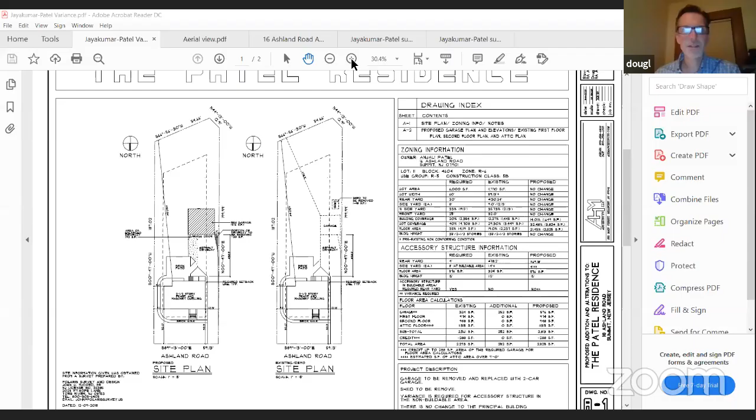The house has an existing detached garage. I could pull up and share the drawings and we can go through them, might be easier for everybody to look at. So this is the same drawings that you have in front of you. What we're talking about is this garage here, in this area, is an existing detached garage. It's about 38 feet from the house. It's 18 by 18, so much smaller than what is typical for a 2-car garage nowadays for a modern car.

So what we're proposing to do is demolish the garage because it's in disrepair and construct a new 2-car garage that's 24 by 24. We're going to keep it in the same location in relation to the house, 38 feet, but we're going to slide it over from the property line. The existing setback right now is only 1.4 feet, and we're going to slide it over to 4 feet.

We're designing it in a way that would be conforming if it was a detached garage, which it is. But in your ordinance, I guess we'll need a C variance for this because it's not in the required rear yard, which would be all the way back here, which would allow it to be that 4-foot setback. But because we're placing it closer to the house, we require an 8-foot setback. So that's the variance we're asking for, a side yard setback, 4 feet where 8 feet is required.

The reason why we placed it here is because if we place the garage all the way in the rear, it would be about 113 feet from the house. And that's just not really practical. To park a car all the way back here and walk back and forth from the house didn't make any sense. I looked through the comments from the various departments, and the biggest concern was the amount of impervious coverage.

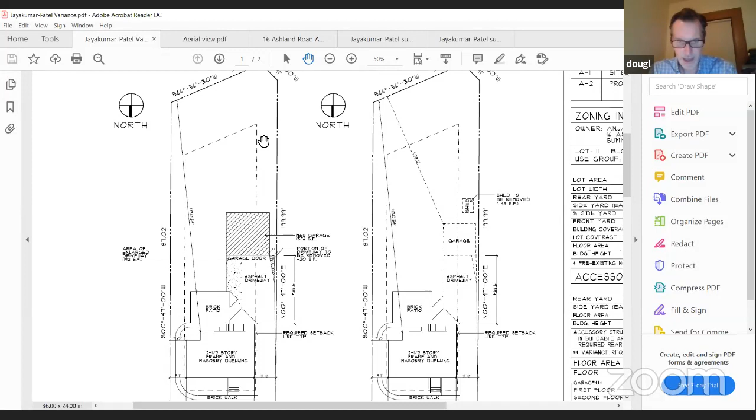So I think we're going to have really minimal impact. The deep lot in combination with the existing non-conforming placement of the garage really gives us few options of where to place it. So I think placing the garage here, the benefits outweigh the detriments. By constructing it here in the rear yard, it's very difficult to see from the street. I think it's going to be more attractive than the existing garage. As I scroll through to the next page, you can see it's an attractive garage.

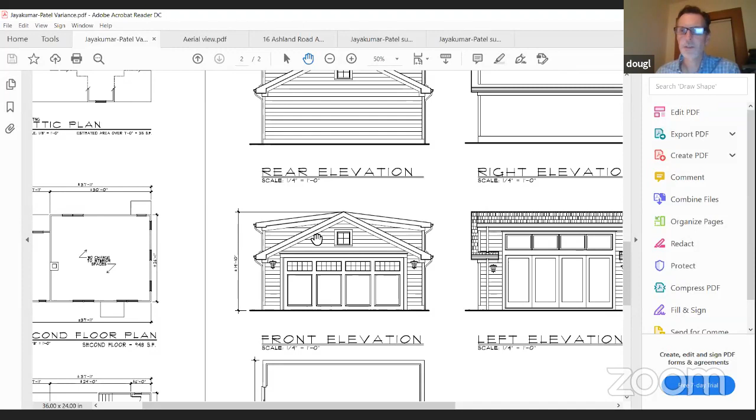It has some nice materials. We're going to be using materials that complement the existing ones on the house, so the garage looks like it was built originally as part of the house. We have some nice pleasant roof lines, and we're going to do a carriage type door on the front of the garage. So overall, I think it's going to be quite a nice improvement to the property.

It's also going to allow them to take their cars that park in the driveway and create visual clutter for the neighborhood, and be able to pull them into the garage and get them out of the driveway. So overall, I think it's going to be a benefit. It also, like I said before, conforms to all of the requirements, and overall I don't think it's a detriment to the master plan of the city of Summit.

So I think that kind of covers it. It's a pretty straightforward application. So I'll open up to any questions.

Mr. Dour, if you'd like to kick us off, is there anything in the engineer's report that we should be aware of? I saw a note about stormwater management, but I'll let you dig in if you feel it needs to be investigated further.

I think they should look into putting in a seepage pit to handle that increased impervious coverage.

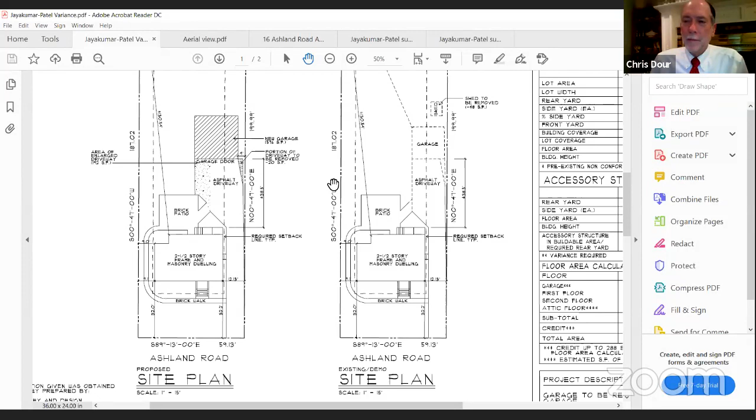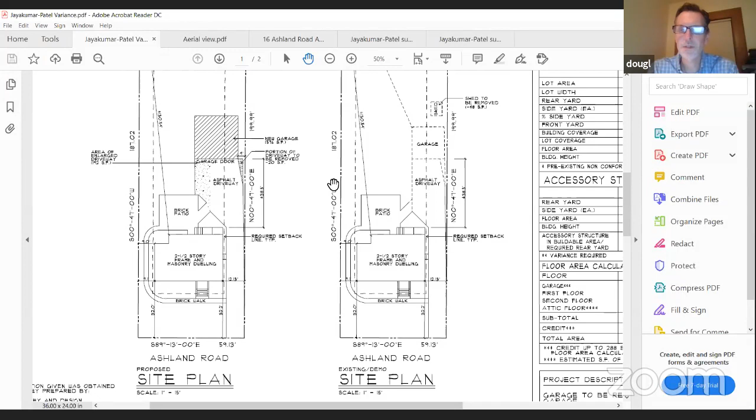I heard that real quick. Did you get that, Doug? Yeah, I think so. What we're planning to do is put in a seepage pit or a dry well to handle the increase in impervious coverage. Obviously, we'll design it to take all the runoff from all the new structures and put it into the dry well, and we'll design it in conformance with the town engineer's requirements.

So we would ask, just as a condition of the application, that you accept the engineer's letter in whole, for which the stormwater management component is a portion of that letter. It's a call out. Correct. Okay.

Any other questions? I agree with you, Doug. It's pretty straightforward. Any other questions from board members with regard to the application?

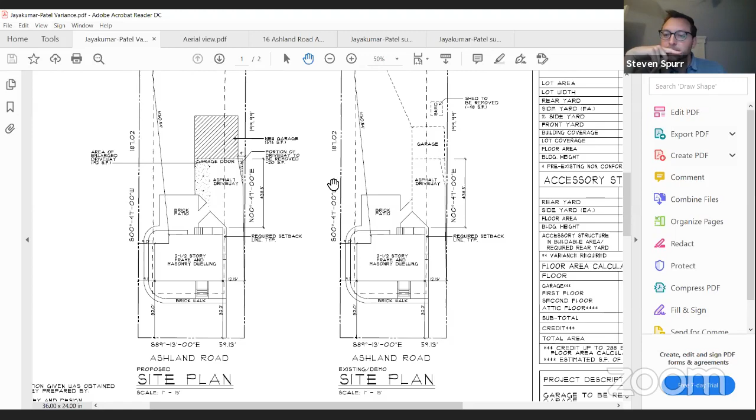I have a question. Maybe this is already covered because you said they're going to conform with the engineer's report, but it did mention the shed, and there's a little shed behind the existing garage, I guess. So is that going to be removed then?

Yes, we're removing the shed. There's about a 50 square foot shed there, so we're going to remove that. That again will kind of open up the backyard and create more open space. Okay, thank you.

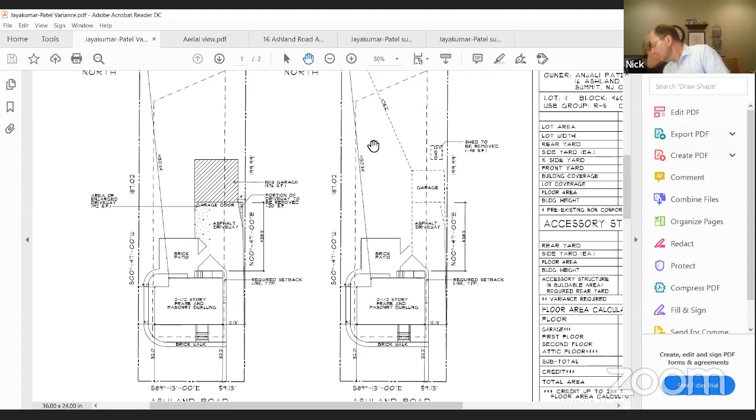Any other questions from board members? Speak now, or forever hold your peace. Seeing none. All right, Doug, I think you did a nice job there.

We'll revert back to the applicants now. Ms. Patel, or Dr. Patel, I think I saw you on the Zoom link there. Is there anything you'd like to say in closing, just to wrap the case before the board moves into deliberations? No, just thank you for looking at my application and considering it.

Okay, thank you. And I'll just pause for a quick second. Are there any neighbors here for questions or comments? I didn't see anyone for this particular application. Before we move into deliberations, wave your hands frantically or hop off mute.

Oh, there we go, Mr. Burns. All right, if you want to hop off mute. Can you unmute yourself, Mr. Burns? Sorry, we can't hear you. I apologize. Oh, there you are. Sorry, did you have any questions for the architect or the applicant, or any statement you'd like to make?

No, I didn't get the architect's name again, what is it? Yeah, my name is Douglas Miller. Okay, and that's AH Architects? AHM Architects in Millburn, New Jersey.

Okay. Yeah, I live three doors down on Ashland Road, corner of Maple and Ashland. Just, Mr. Burns, the number of your home? I'm sorry, 128 Maple Street, which is the corner of Ashland and Maple. We've lived here 34 years.

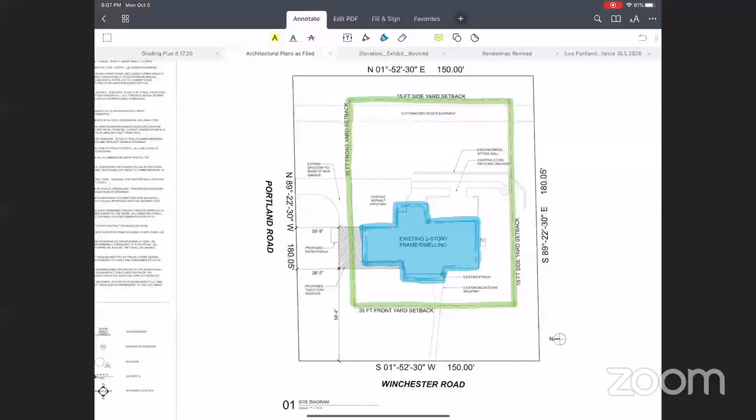Chris, is that visible now? Yes. Okay, and we'll mark this as A1. That was not submitted prior. Correct, this is the architectural plans just rendered by yours truly. This site is a corner lot at the intersection of Portland and Winchester Roads. The existing home is a Georgian colonial located in the building envelope closer to the Portland side than the right south side. It has large front and rear yards, contributing to the practical difficulty and ability to improve this property as a single family home, consistent with the character and style of the neighborhood and modern homes in the area.

If I can mark this as A2. What Miss Elizabeth Rush, the architect, has achieved is to balance the left side of the home, the north side of the elevation, proportionately with the right. This proposal includes a new bedroom, sitting area, bathroom, office, attic storage, and the creation of a 3-car garage where a small 2-car garage currently exists. There was an opportunity to review the comments of Krista Anderson, where she raised the question about the home having a second unit potentially. This addition is intended to create a guest space, but not a standalone unit or apartment.

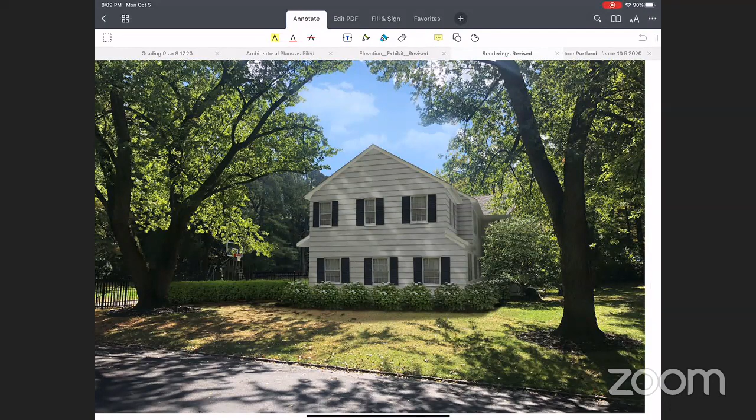This perspective shows what the side along Portland Road will look like, eliminating that portico. This will be substantially similar to what will actually be constructed. The applicants may consider doing a little bit more articulation, but that would be a late stage decision. This will also decrease the variance requested, creating a setback of about 26 feet. They've also eliminated the pocket door inside the home from the second floor hallway to the proposed addition. It will instead be an open access.

There are two variances associated with the proposal, including the front yard setback to the Portland Road front yard. It was initially about 22 feet to the small porch. Now it's 26.2 feet proposed to the new garage wall, where 35 feet is generally required. It is noted that it is about 35 feet from the garage wall to the street, as there's no sidewalk.

I'll mark that in green. This small area here is the expansion of the existing driveway. That will allow access to the new garage. The driveway is 15 feet wide at the curb line. The main section is just under 11 feet wide.

Ms. Anderson's comments show that this is a violation of the ordinance regulating width of the driveway in the required front yard. Because it is a corner lot, this side along Portland Road is a front yard, and that creates the need for the variance here. It should be noted also that the rear entry garage contributes to this because it's not front facing. If it was a front facing garage, which we believe is a less attractive design than this, the driveway could be just the width of the garage opening.

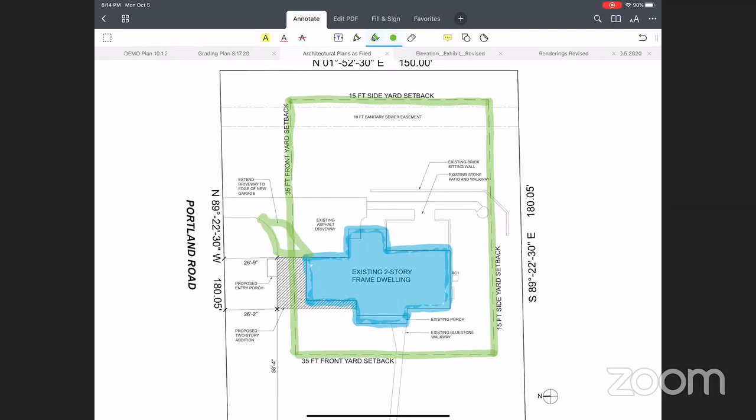The benefits to be gained by this proposal—providing the applicants and the community with an improved architectural appearance and balance, and providing the applicants and their family with a functional living area—substantially outweigh any detriment. If the board should have any questions of me at this time, I'd be happy to take them.

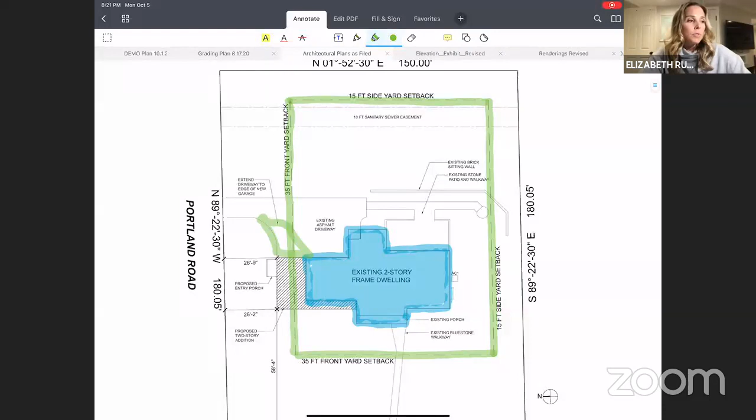The multi-pane windows, the gable roof lines, and the double height columns at the primary front entry along Winchester Road are in keeping with the Georgian architectural style and present a clean, refined aesthetic.

While designing the addition, it was the intent to keep the existing aesthetic consistent with simple massing, proportion, and symmetry. The existing roof line running parallel with Winchester will be continued at the same height and slope over the new addition, creating a similarly scaled volume on the left side of the large front entry porch.

The existing garage with a roof cupola is not consistent with a Georgian colonial and creates an uneven, unbalanced elevation. To resolve this, the addition provides more massing, more windows, matching shutters, and a slightly lowered second floor roof to create articulation, appropriate scale, and differentiation.

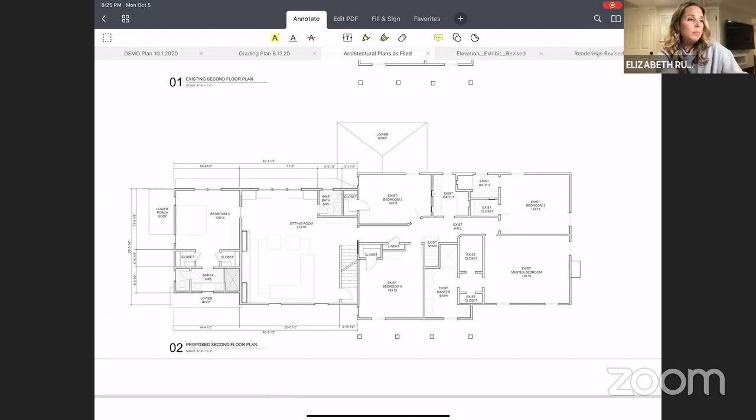There is a home office proposed in the new attic area, accessible by a walk-up stair from the sitting area, and two windowed shed dormers will be provided to give natural light and interest to the rear elevation. If you go to the architectural elevation sheet.

I can, Elizabeth, real quick. Chris, this should be A4. This is an updated elevation showing the changes that we made from Ms. Anderson's comments. Okay.

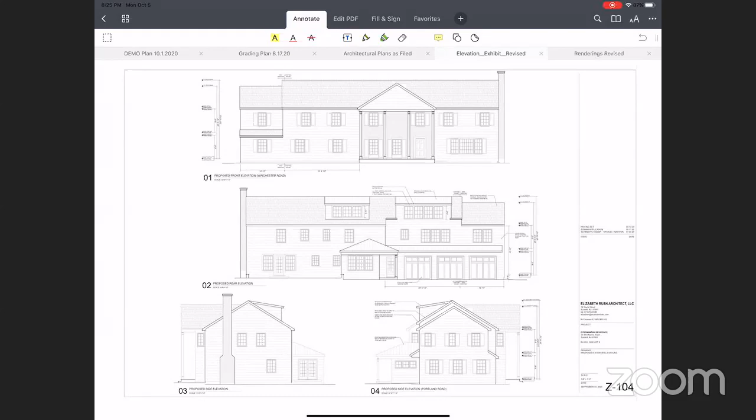The overall height of the addition will match the main roof line of the existing house. It's just over 26 feet tall.

In terms of square footage, we are compliant on lot coverage at 20.6%, building coverage at 10.8%, and FAR at 18.9%. We believe the proposed design achieves the programmatic requests of the family while also providing balance and scale that the front elevation of the house is currently missing.

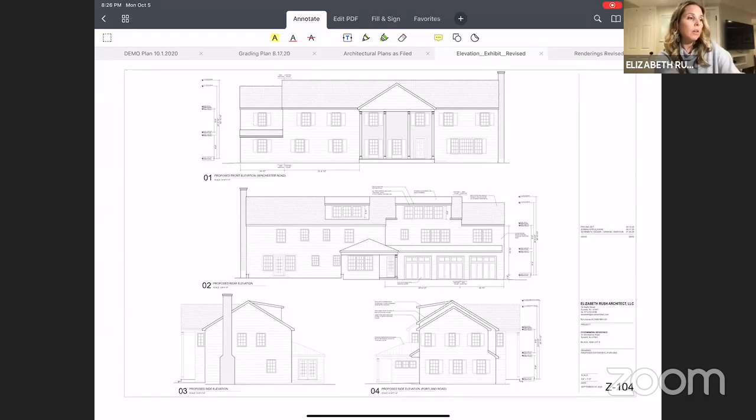Just a couple points on the lot property characteristics. If we can go to Andrew Clarke's grading plan. So on the left, you'll see the existing conditions. This has been submitted to the board, so you should have this. And on the right, you'll see the proposed conditions.

It is a large lot, about 27,000 square feet, with 150-foot frontage along Winchester Road and a 180-foot frontage along Portland Road.

The character of the neighborhood established a consistent spacing along the front and rear of the property that has been maintained in planning for the garage addition. The proposed 2-story addition aligns with the existing front of the house and is 50.8 feet from the front property line at Winchester Road, where 35 feet is required. The rear of the property maintains a deep lawn that is consistent with the other homes along Winchester as well.

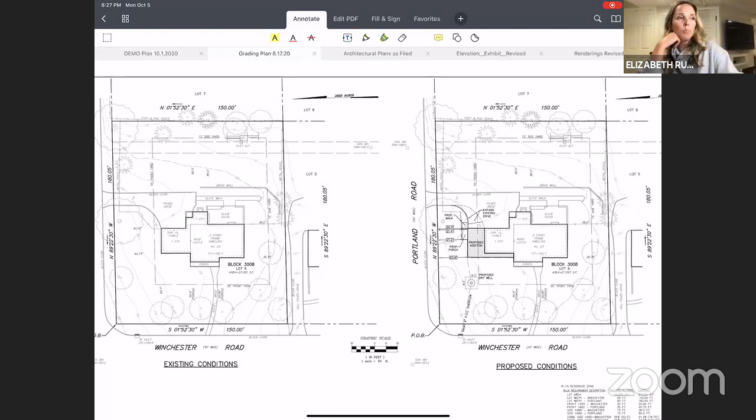Along the 180-foot property line of Portland Road, the short end of the addition is 25.8 feet from the property line. I would like to note that the corner property directly to the rear, number 11 Warwick, maintains a similar setback from Portland Road at 22 feet.

As you can see from the lot grading plan, the property line along Portland Road, I believe Sam mentioned this, is 10 feet from the curb. Therefore, the vantage point at the street at this angle, the addition is set back 35 feet from the curb, or the street, since there's no sidewalk there.

We feel this is completely in keeping with the existing scale of the neighborhood and that the lot size can definitely accommodate the proposed improvements. As a result, it is requested that the proposed application for development be approved based on the following reasons.

The improvements to the home are in keeping with the character and scale of the other homes in the neighborhood. The addition will be consistent with the architecture of the home and will not be higher than the existing structure, and it will be aesthetically pleasing and improve the appearance of the home. Thank you.

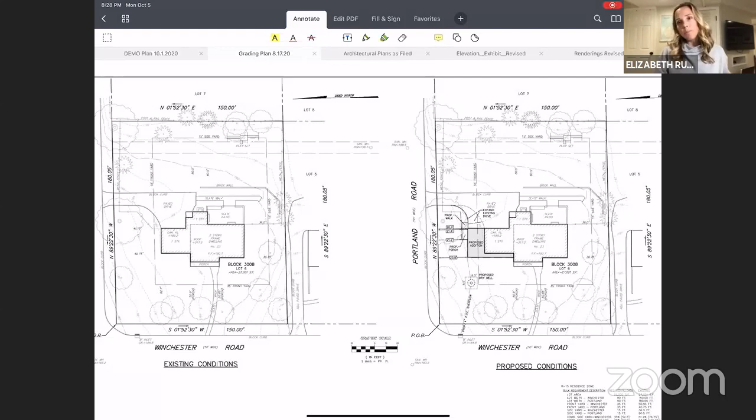Thank you, Elizabeth. Okay, let's see if I can get back here. Okay.

Does anyone from the board have any questions for Ms. Rush? Any questions? Same for you, Chris, if you have anything for the architect.

The only thing I saw in the engineer's letter was maybe the location of the air conditioning and generator, if that is part of this application. At this point, it is not part of the application, but it would comply with the ordinance.

Okay, so one minor question. What's the interior width of the existing garage? I know you mentioned the exterior width was 21 feet. The interior width where they drive in, how wide is it? I'm just wondering, do they have 2 bay doors existing right now?

They do. Where the 2 bay doors are, it would be exactly 21 feet finish. It's 21 feet, 5.5 inches to the exterior wall. Okay, it's interesting. My garage is 21 feet and I can get 2 cars in there, no problem.

I think if you want to pull up Sam sheet Z100, you can see the existing plan of the garage, and they have a wall that's right on the inside of that first bay. And because it is a side entry garage, it makes that turning radius hard to use the bay that's closest to the mudroom. I see what you're saying.

Yeah, so you have a tendency to clip that wall, so they really only use the far bay. You don't want to nail the house when you're turning into the garage. That's a bad thing.

Any other questions for the architect from the board? Okay, quiet on this one. Any questions from members of the public? All right, hearing and seeing none.

You said, Samantha, you have an engineer in reserve. We'll leave it to your discretion whether or not to present the engineer. That's right. Mr. Joe, would you have any questions for the engineer?

The only thing was they've already included the seepage pit or the dry well, so that's a plus. That covers all the increase in impervious coverage. We mentioned before about the generator and air conditioning, and that you said they would meet the ordinance as far as screening and also hours of operation. So that's really our only comments.

Of course, thank you. So we would just ask as a condition that the applicant accept the engineer's letter. That would be it. That's acceptable, Ms. Alfonso? Yes, thank you. All right, great.

Okay, then Ms. Alfonso, if you'd care to close, or actually let's ask the public, just as a perfunctory measure, if they have any comments on the application. And seeing none, you may close, Ms. Alfonso. Thank you. Thank you.

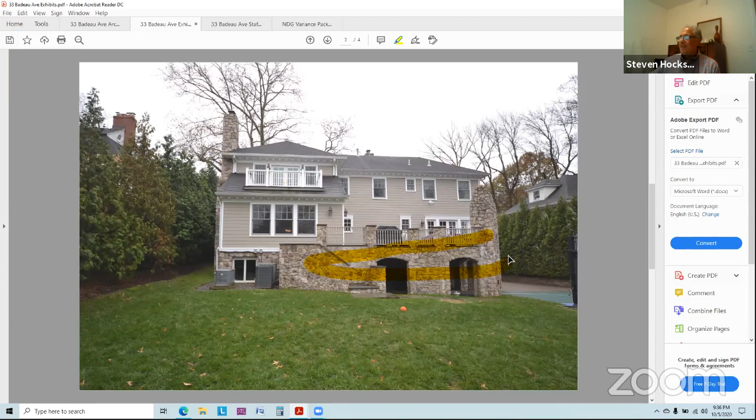Okay, excellent, please proceed. One of the things they wanted to do is get rid of this double height space on the front of the house, so that's part of the scope of work. The other part was what they call the Game of Thrones rear deck, which they wanted to get rid of as well to make it less massive on the back of the house. Another thing they wanted to do was take this rear deck area on the second floor and enclose it as part of the master bedroom.

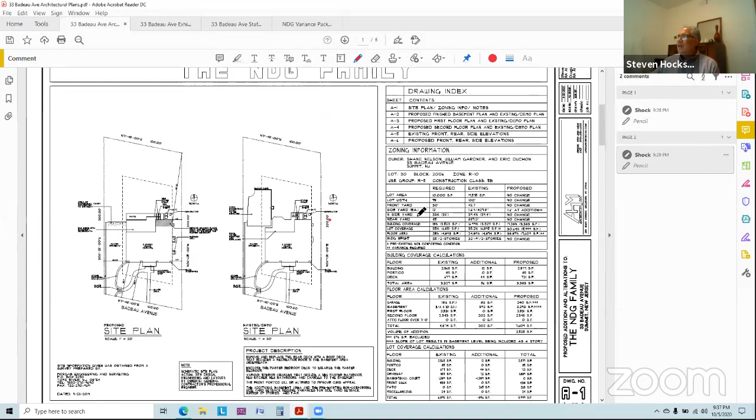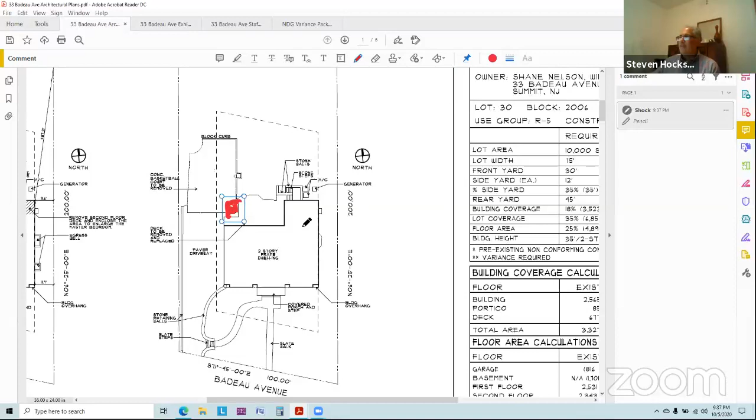If we go to the plan, I'll show you—what we're doing here is this area under the deck is already covered space on the outside, as you can see here. The only addition we're asking for is this little space, which amounts to 44 square feet of additional space. Unfortunately, the way zoning works in Summit, because of the slope of the lot, you have a grade plane approximately halfway down between the basement and the first floor. By adding this little bit of basement area, the definition of the basement now becomes a story, which triggers what look like big variance requests, but it's really just a definition of the floor area of the house.

Just to show you some other things we wanted to do—the existing master bedroom—and I'm sticking to the work that directly affects the variance. There's a lot of other interior work we're doing that isn't relevant to the variance, so unless you want me to go through all the details to save time, I'm going to stick to the issues affecting the variance. Right now the master bedroom is here, the entrance to the bathroom is over here, and the only place to put a bed is on this wall.

And there are windows on this side of the house. So what we're proposing to do is take this deck area and incorporate that into the master bedroom.

It does a few things for us. It gives us a little more privacy with the right side neighbor because we're eliminating those windows, and it allows us to put a bed on this wall or this wall. And then somebody gets up, they can get into the master bathroom, they can go into the closet, and they can exit without disturbing anybody that's sleeping. So it improves the function of the master bedroom.

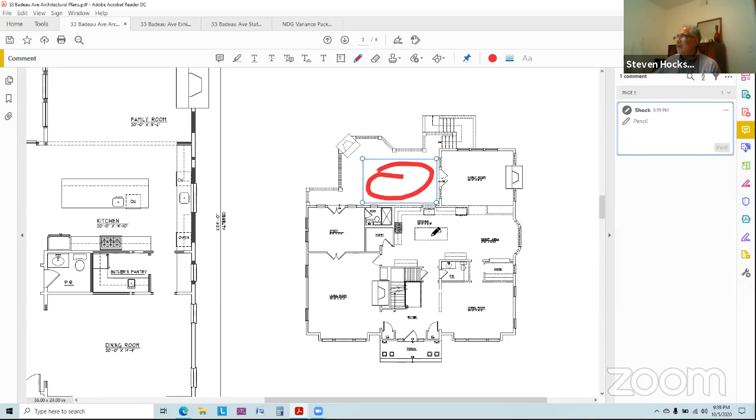On the lower level, the first floor, one of the things that happens is... wrong floor. The existing kitchen, which you can see over here, has no real relationship to the deck. In order to get from the kitchen to the deck, you got to go through this little opening into the family room and go out the doors here.

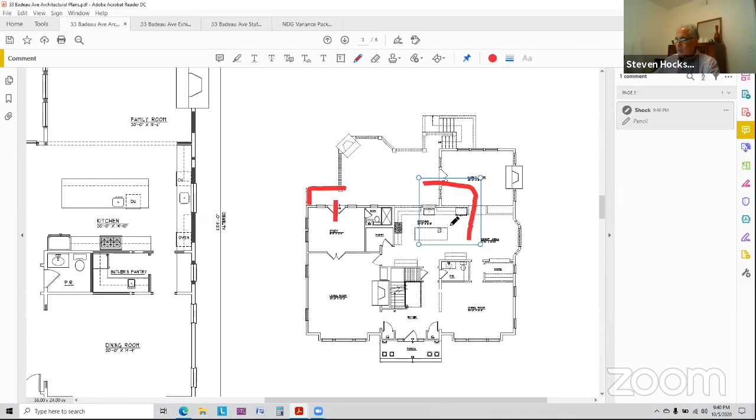The other thing that happens is right outside of the study, there's a guardrail right in front of the door. So if you look at the elevation, you can see there's this railing right in front of the door. So as part of our work, we're improving the flow from the kitchen, adding doors there, taking this wall out here, and doing what most people want now, which is more of a big open kitchen eating area. And then you can come out of the study and you're not walking right into a guardrail here.

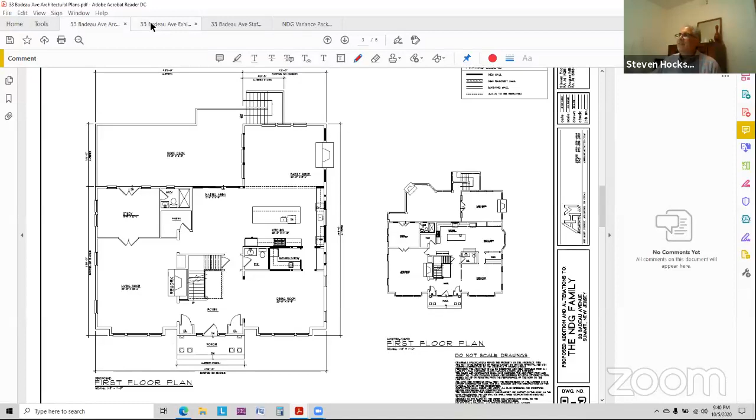So those are the changes on the inside. On the outside, like I said, we're eliminating this big two-story element and we're making it a little more in proportion with the house. So we're getting rid of this big... I'll be nice and just call it ugly.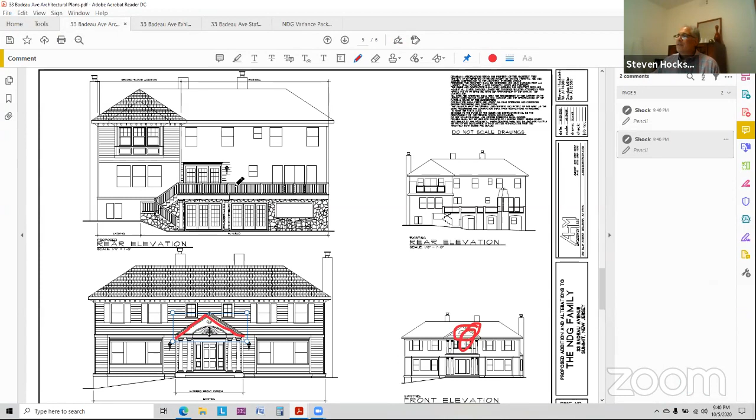One of the other things that we're doing that's important to this project is we are eliminating this basketball court here. So the impervious coverage on the site is being reduced by almost 900 square feet.

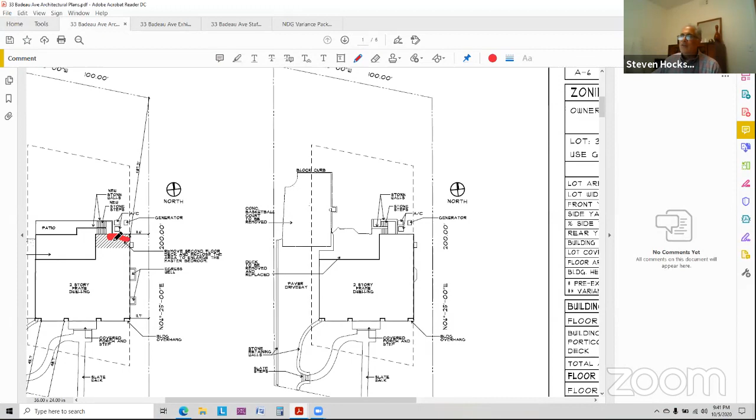So with that being said, we're asking for a few variances. One of them is the 11-foot 6 side yard variance, which is not really encroaching any further on the neighborhood than what's on the right side neighbor than what's there. We're just doing a vertical intensification, which is enclosing this space here.

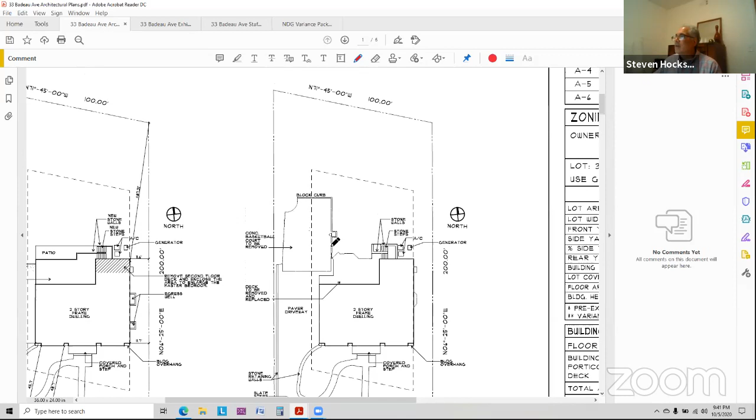And then the floor area variance and the basement variance for adding a story are related in the fact that by enclosing this space here, which you can see right here, even though all of this is already underneath the deck, it doesn't count as basement because by the definition in Summit, since it's open around the edges, it's not counting as basement. So we're adding 592 square feet of basement, but in reality, only 44 more square feet of the space is not already under the deck.

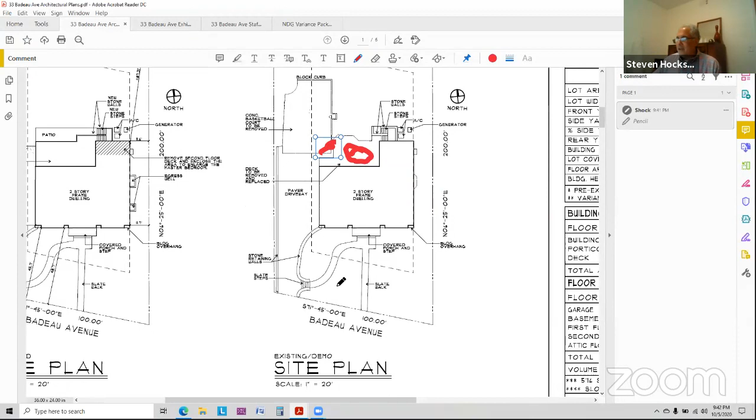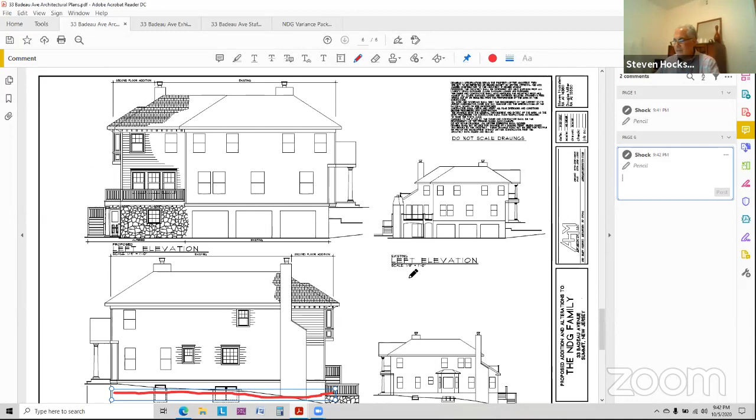And like I said, the variance for the basement is being triggered by the fact that the slope of the lot is generated by this grade plane, which now redefines the basement as a story. And if it wasn't for the basement floor area, we'd only be asking for a 246 square foot variance. And the difference is we'd only be asking for a 26.25% variance. So the variances we are asking for, sorry.

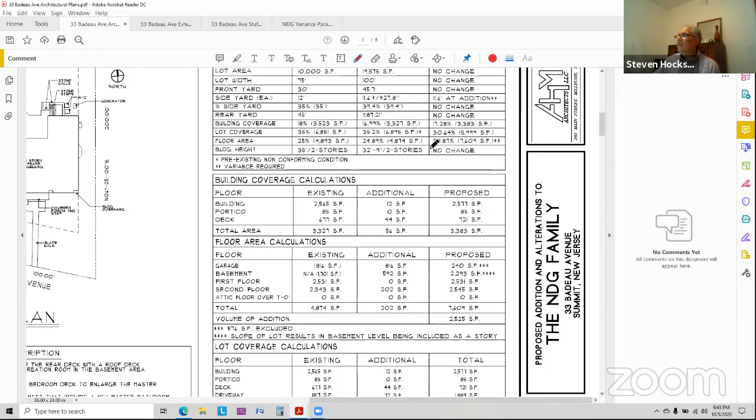Just give me a second to get there. We're asking for a variance for the building, the amount of stories, which is becoming from a 2-story to a 3-story. And we're asking for a floor area variance of 38.87%. But like I said, almost 13% of that is because of the basement.

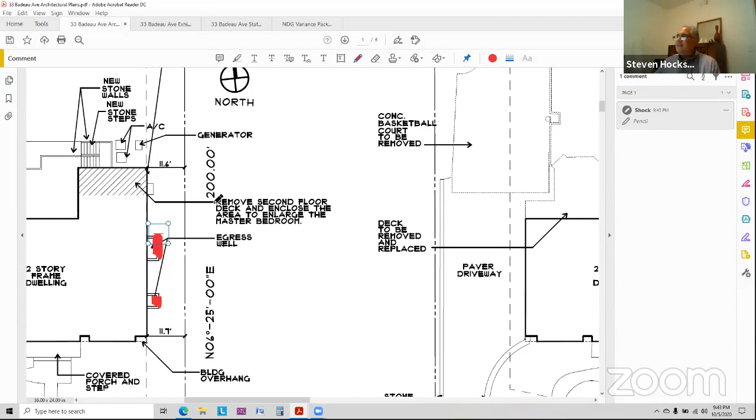And then we're also asking for a side yard variance that Krista Anderson pointed out to, because the new rules haven't come into effect yet, that these egress wells are encroaching 3.3 feet into the side yard, which when the new ordinance comes out, would only be a 0.3 square foot variance. Some of the reasons that we believe the variance should be approved is that the addition is virtually on the rear of the house.

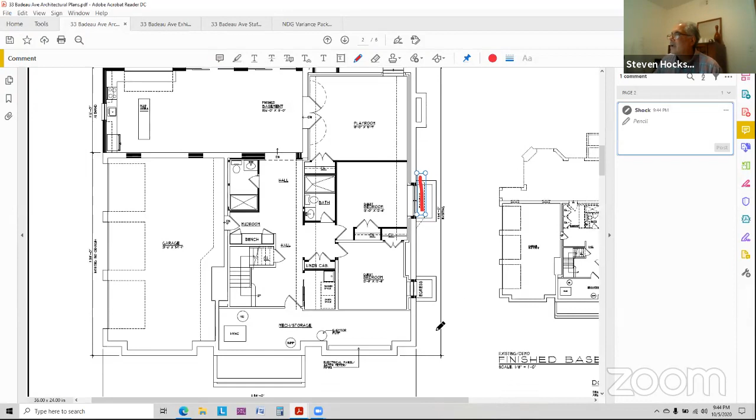We're removing these right side bay, which is on this side of the house. On the first floor, there is a bay that we're eliminating windows on the right side of the house. And we're also improving the curb appeal of the house. And lastly, we're reducing 900 square feet of lot coverage.

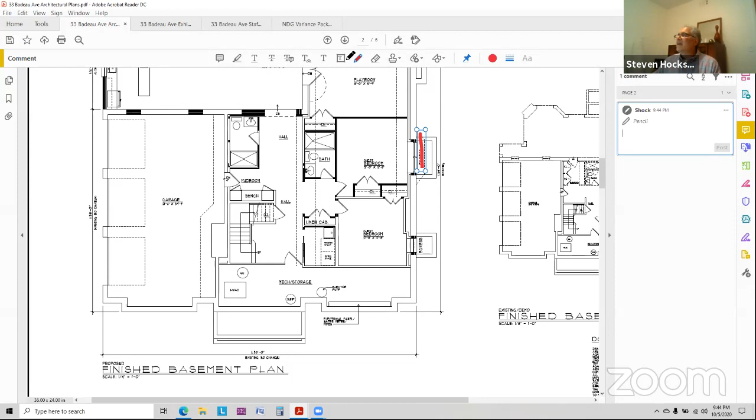And we feel that what we're asking for is very reasonable, and that most of what we're asking for is triggered by the fact that the definitions of the floor area and the building height are being affected by the fact that the basement is now considered a story. And we think that the application has a positive impact for the owners, and there's really no detriment to the town.

As a matter of fact, it's improving the aesthetic as far as curb appeal. Even the historic commission has agreed with us. One question they asked was what materials we're using. I want to share the screen again and show that we're going to match the hardy board, the details and the dentils, so the addition looks very seamless. With that, we ask for your approval.

Questions? Mr. Dower, anything you'd like to mention in the engineer's report? They actually covered everything. As noted, there's about a 900 square foot decrease in impervious coverage. I would just ask that the generator be exercised during weekday hours between 12 and 3, as we discussed as a condition. Even though it's an existing generator, there is also a lot of screening already, so I think that's fine.

Okay, any questions from members of the board? Hearing and seeing none, my only question was with regard to impact on the very mature screening along the right side of the home, that right side property line, which those trees may be on the adjoining property. Just curious if you anticipate any impact during construction on that screening. No, we're not doing any excavation or change on the ground on that side of the house, so there won't be any impact to those trees.